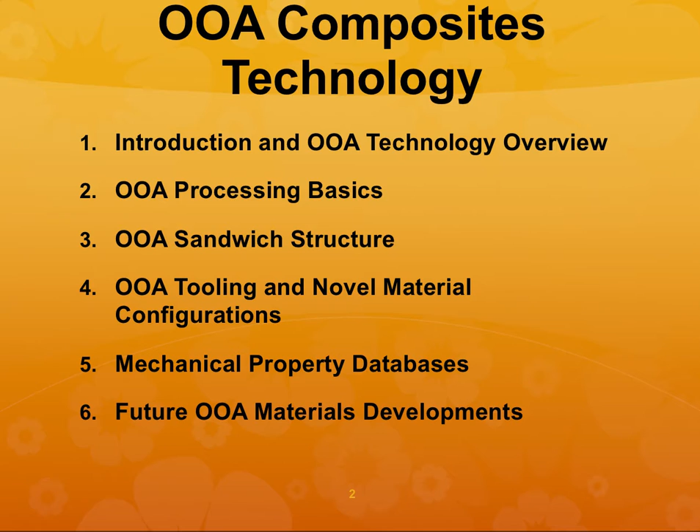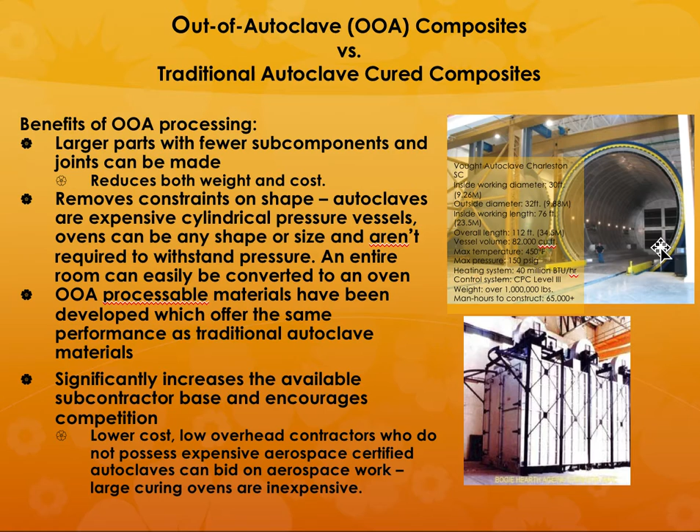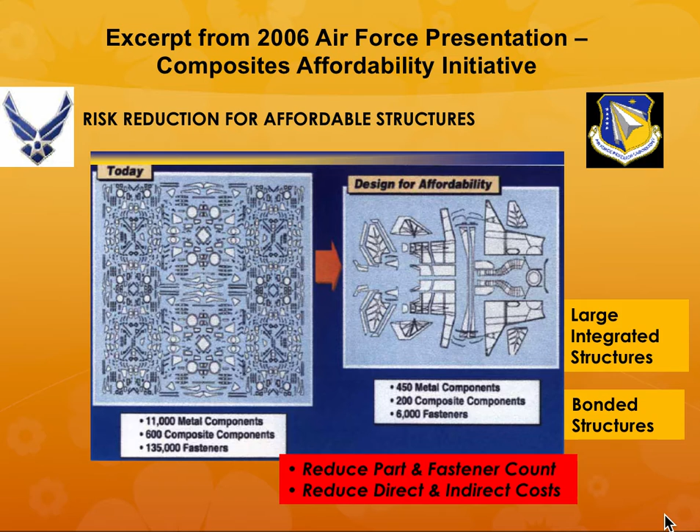So a couple of years ago, maybe 10, 11 years ago, the Air Force started a process, especially when they were thinking about making the F-35s using about 40 to 50% composite parts. They said that if you have to reduce the risk for affordable structures, especially affordable composite structures, then you need to make them all in one piece. Large integrated structures, bonded structures, and most importantly, you need to reduce the part and fastener count. So it reduces the direct and indirect cost of components.

So if you can remove the size and geometry constraint that is due to the autoclave size and shape, then you can make large parts and you can use relatively inexpensive equipment such as an oven. For example, we work with a startup company here in town called Infinite Composites, and we are making about 20-foot long by about 2 to 3 feet in diameter composite pressure vessels. In the past, they could only be made using an autoclave.

What we did was we just put a furnace around the part after it was made, and literally the outside walls were made out of cardboard. The inside was well insulated, so whatever temperature it went to, it did not burn off the cardboard walls of the furnace. And if you have to redo the furnace, you could do it.

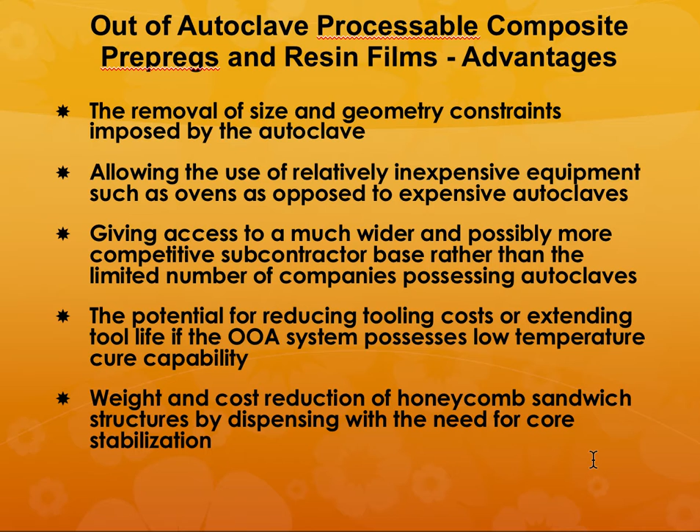And it helps to reduce the tooling costs because the out-of-autoclave system possesses low temperature cure capability. And then you can reduce the need for what is called core stabilization. So again, it reduces, it goes to the point of reducing cost.

I'm not going to go over every single slide in this presentation, but I will quickly go through it. I would like you to go through this presentation, and it's pretty self-explanatory.

So I talked about what are the advantages, and next we will talk about what are the materials. You can use low cost oven and vacuum bag processing, but the most important requirement is that the pre-preg has to be breathable, and how you put it together is very critical. And then when you are heating it up, the resin has to flow and evenly wet out the fabric.

So viscosity during the cure cycle is critical. It must remain high enough so that it doesn't flow out, and the matrix remains within the part, but it needs to be breathable also so that there is no porosity left behind.

By the way, why do people typically use autoclaves? It's because you want to avoid porosity in the part as much as possible. So when you make it using an out-of-autoclave process, you have to make sure the porosity is minimized and within the requirements of the part.

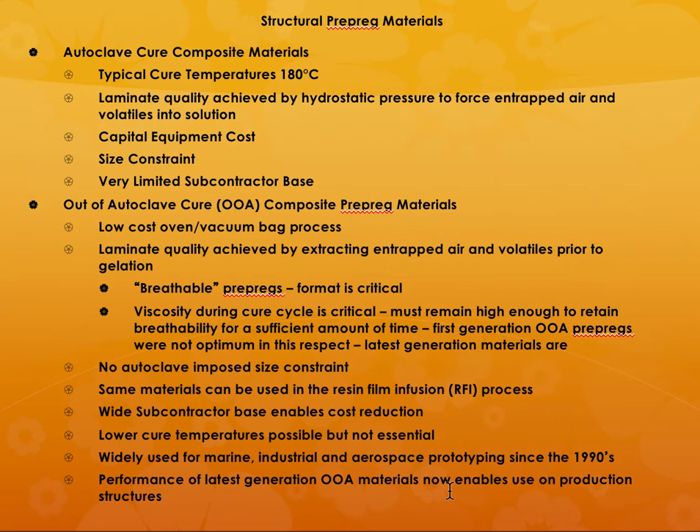What is the requirement of out-of-autoclave processing? The material we use has to result, maybe not the same as 100% of what you would get with an autoclave process, but at least it should be 90 to 95%. It cannot be like 65 to 50%. It has to be about 90 to 95% of what you get in an autoclave process.

These are being used in a number of industries, and you can use all kinds of standard composite processes: wet layup, liquid resin infusion, resin film infusion, and prepregs. So what you would like to do is use prepregs as far as possible.

Why prepregs? Because prepregs are more standard. You do not have to worry about the quality of the prepreg because somebody else is making it and giving it to you. So you can use prepregs in an autoclave process more than any other type of process. But resin film infusion, or RFI, is also another technique that autoclave processing has been using quite a lot.

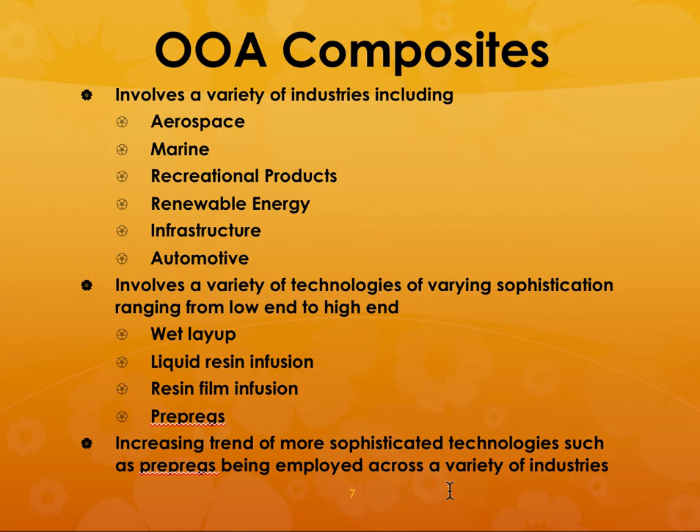In the liquid resin infusion process, there are three varieties: RTM, VARTM, and another process called SQRTM. I think I will remember the definition of SQRTM in a moment. Let me check that, I will tell you what it is. I want to remember that.

SQRTM. It does not tell me that exactly. So maybe that is another thing that you could probably look through.

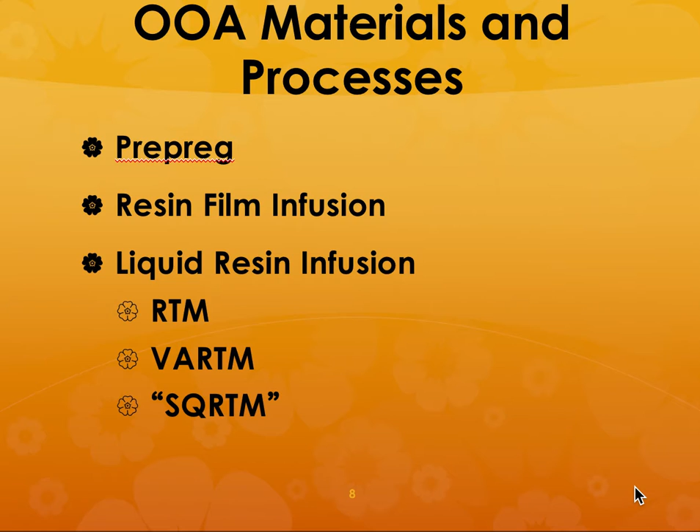I'm glad I looked it up. That's something I learned today. I had remembered, but I'd forgotten what it was. So thank you for making me do that.

For pre-preg, there are a couple of things you need to know. First, you can have a 350F pre-preg or a 250F pre-preg. The Advanced Composites Group qualifies 350F as HTM, or high temperature molding technology, and 250F as MTM, medium temperature molding technology. These also need to be post cured afterward, load post cured, so whether or not you use post cure, you can call it differently.

There is also another set of prepregs called low temperature molding technology, or LTM. The advantage is you can use low cost tooling, so if you are making a first prototype, you could use LTM material. They also have variable temperature molding, anywhere from 150 to 250F. One thing to note: if you use 250F, you cure for a shorter time; if you use 150F, you have to cure for a longer time.

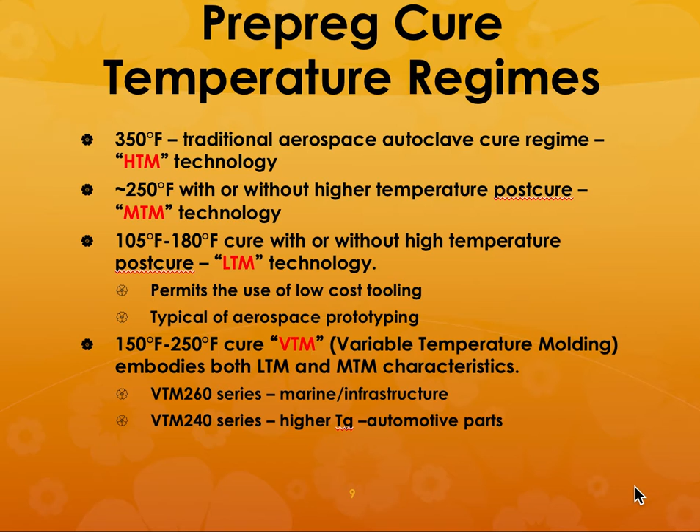These prepregs come in different series, signified by properties like high viscosity, low flow, intermediate viscosity, or low viscosity for heavyweight reinforcements, etc. The advantage is that many of these systems are co-curable and have variable cure capabilities. So you can cure 16 hours at 149 degrees F, then post cure at 190 degrees F, or do 16 hours at 149 and post cure at 250 degrees F.

If you use these components at room temperature, you don't need to do a post cure. One thing to note: many of these pre-pregs, even kept in the freezer, only last about 6 months. And if you take it out of the freezer for cutting and similar work, the out life is more than 30 days.

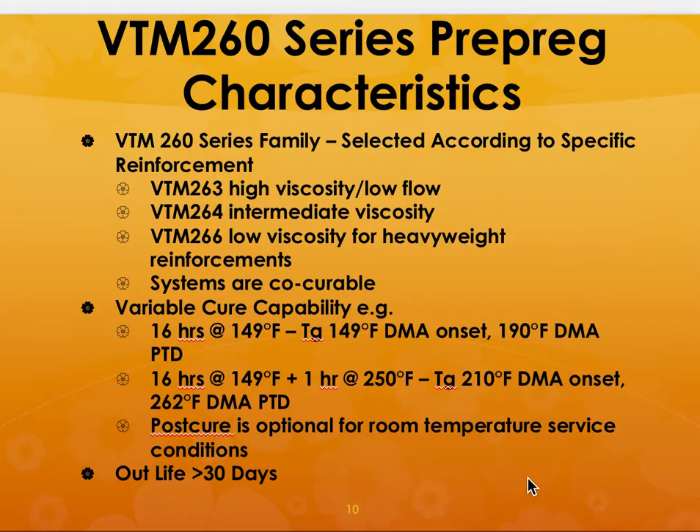Here are some marine applications: high performance yachts, interiors, hull structures, and components that are high up, using vinyl ester based materials. The advantage is that you would cure it at 65 degrees centigrade or 150F, allowing the use of low cost tooling.

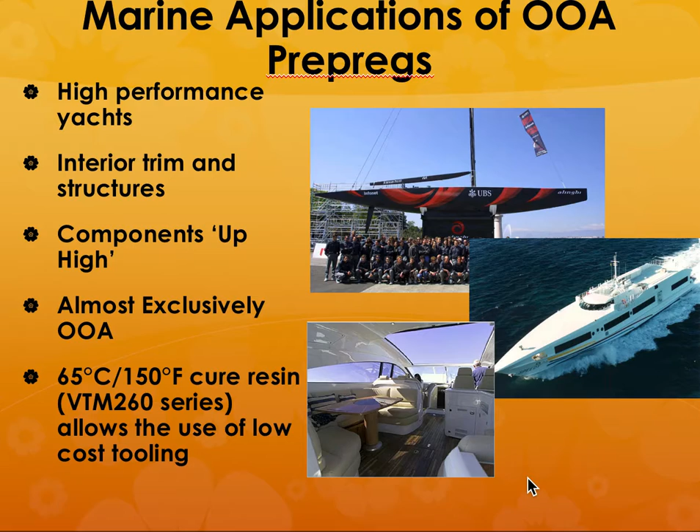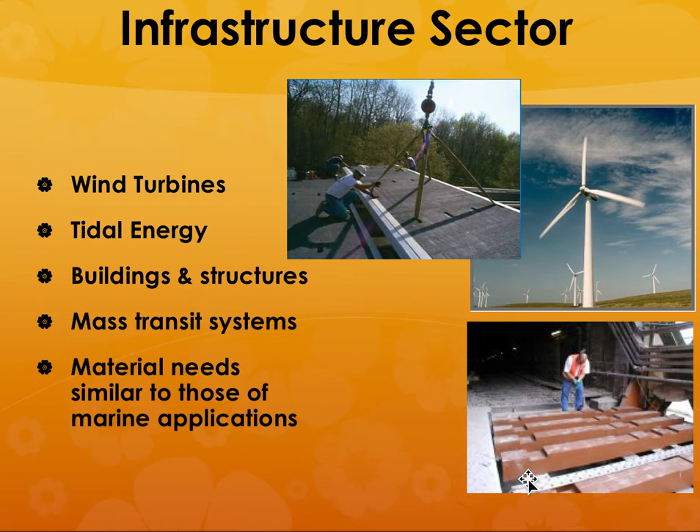In infrastructure, you would use these for wind turbines and mass transit systems, with material needs similar to marine applications. Or, if you are making them on site, you'd use them there too, since you cannot take it into a furnace; you have to cure it outside. So if you needed to heat it up, how would you do that?

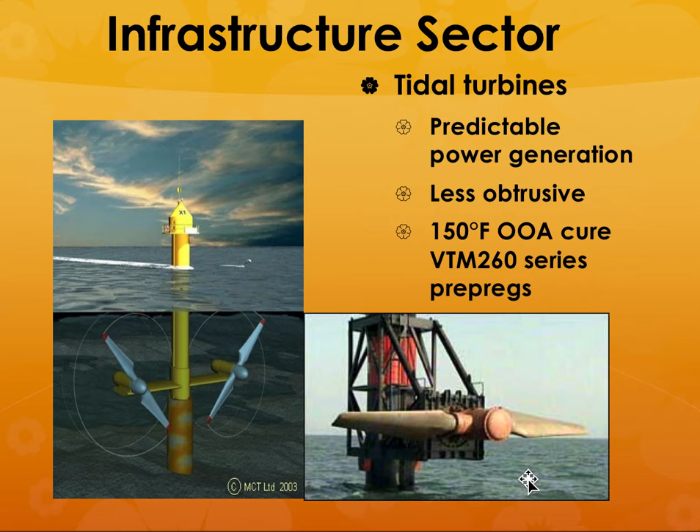You have to use heating jackets, which heat up to a certain temperature, so you can't go very, very high. You could probably go maximum to around 120 to 150 degrees F, or maximum 250F, not more, because your tooling has to transfer that heat inside to the component. If your tooling is very thick, you cannot really heat it up a lot.

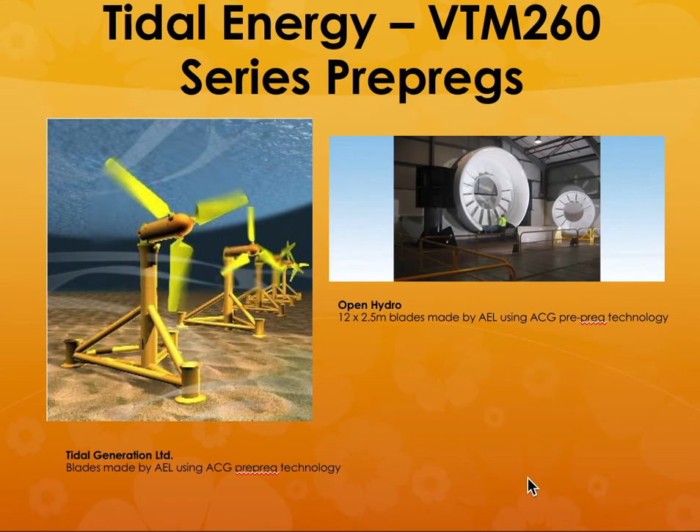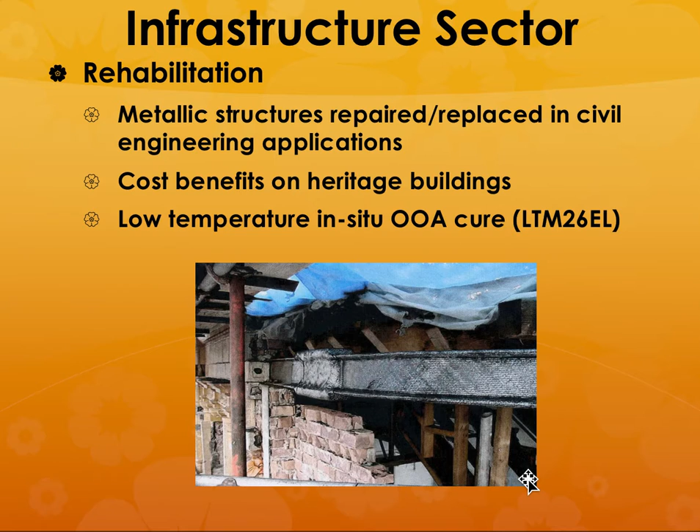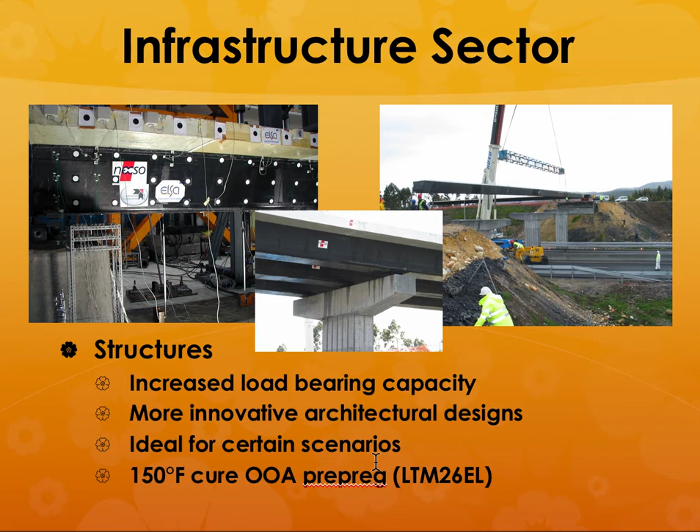So you can make components on site using out of autoclave methods. Or if you're doing infrastructure work like bridge repair, civil engineering repairs, or repairing heritage buildings, the advantage is you can do low temperature in-situ out of autoclave cure. Using a lower temperature cure, once it's done, it's as good as new. The advantages of such repair include increased load bearing capacity and the ability to make very innovative architectural designs, ideal for certain scenarios.

Marine infrastructure uses low cost resins like vinyl esters or polyesters, and glass fibers are almost exclusively e-glass. For aerospace, you have to use a higher temperature cure, so it could be graphite epoxy, and those need to be heated using solar heating, focusing the sun's rays onto the prepreg in order to cure it.

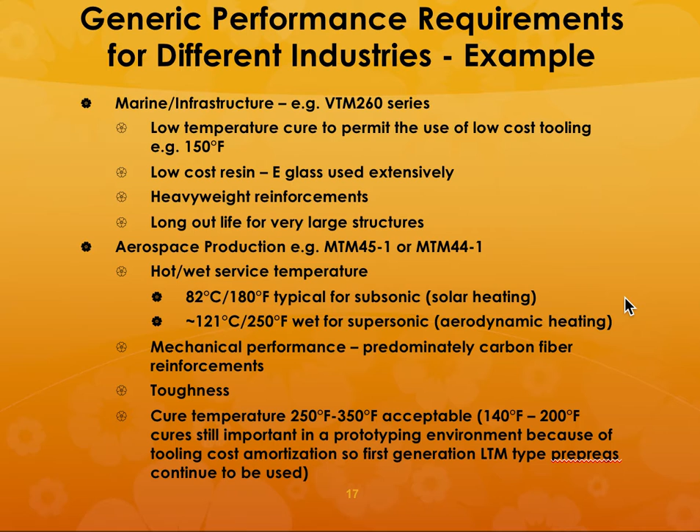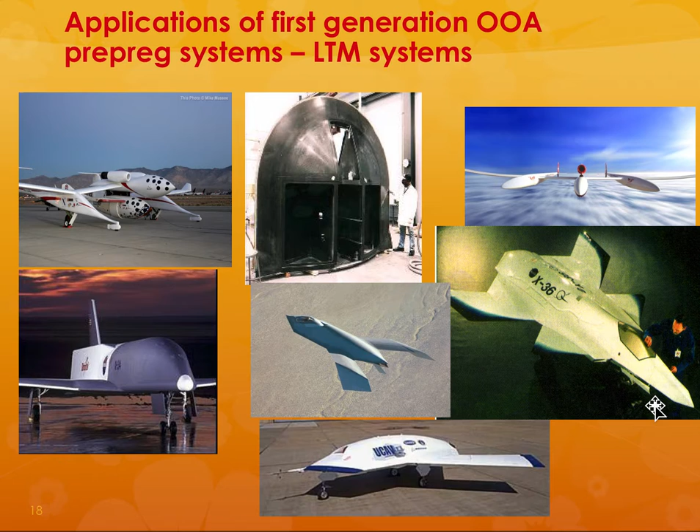So again, these are some examples of where composites are made using out-of-autoclave processing. Here is the solar plane that was completely made in one single piece, made by a company out in California, probably Virgin Galactic. And then this one is made by Lockheed Martin at their Palmdale facilities—it's a UCAV, unmanned combat air vehicle. This one is the X-36 plane.

So these are all made using out-of-autoclave processing. Here is an example of cost savings achieved using the first generation, low temperature curing at 60 degrees centigrade. They have figured out that the cost savings itself is 70% in tooling, and design and development is 23%. So it gets down to this much—tooling cost reduction is 70% and part cost reduction is 50% using this approach.

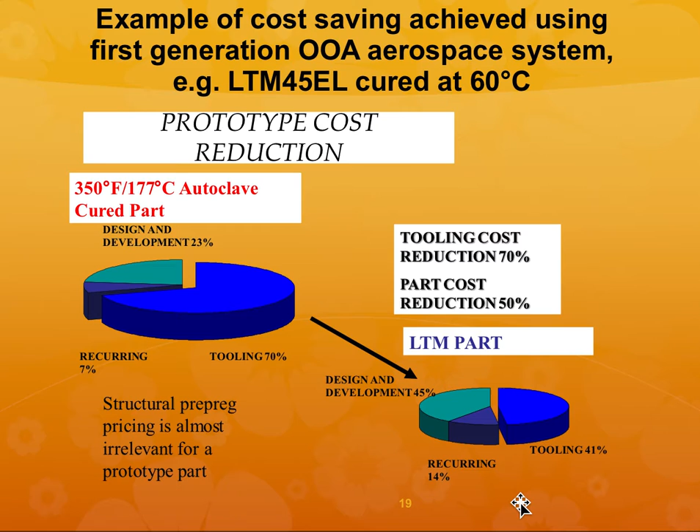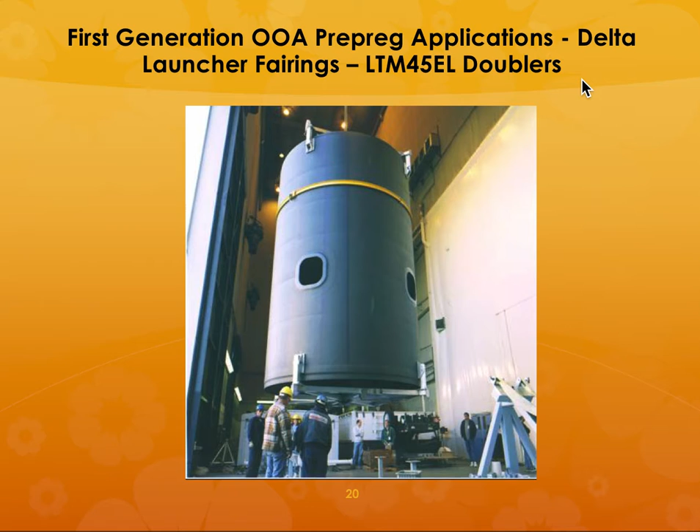So this is the Delta launcher fairings, and they are made using low temperature out-of-autoclave pre-preg. So what are the issues we need to worry about? You need to worry about porosity, toughness, how much life you get when you take it out of the freezer, what is the cost, and what is the handleability of these materials.

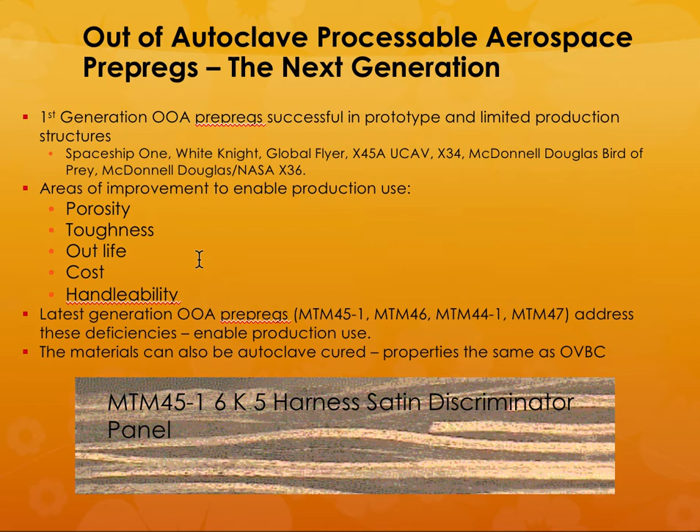So you can see this is the standard material properties, and if you increase the temperature to which these are exposed, the standard material has a reduction in compression strength after impact versus wet Tg for various pre-preg epoxy resin systems. This is the autoclave curing system, and this is the out-of-autoclave capable system. What you can see is that the out-of-autoclave system is even better than the autoclave curing system, even after exposure to wet conditions and higher temperatures.

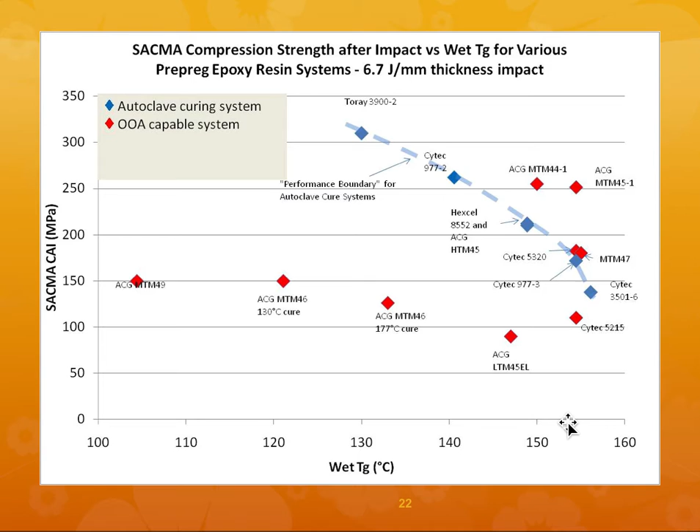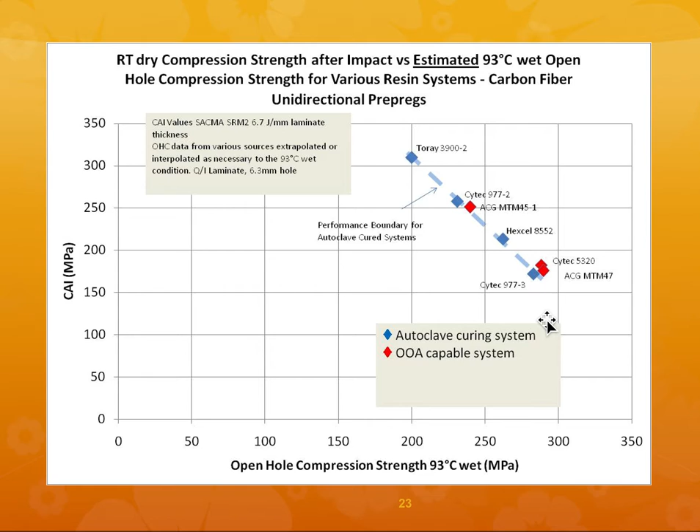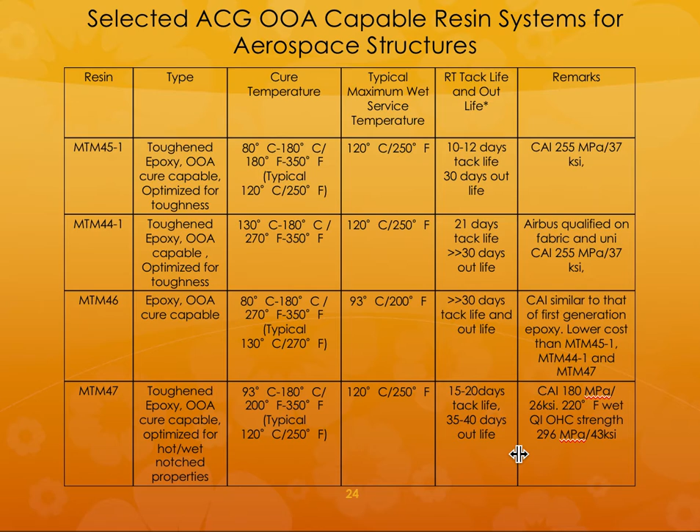So what is the advantage? You can keep them out for 10 to 12 days, with 30 days out-life. In this case it is 21 days. This could be more than 30 days—about 15 to 20 days tack life, 35 to 40 days out-life. So all you have to do is ensure you're using it within the time limitation, and you should be able to get the right kind of properties.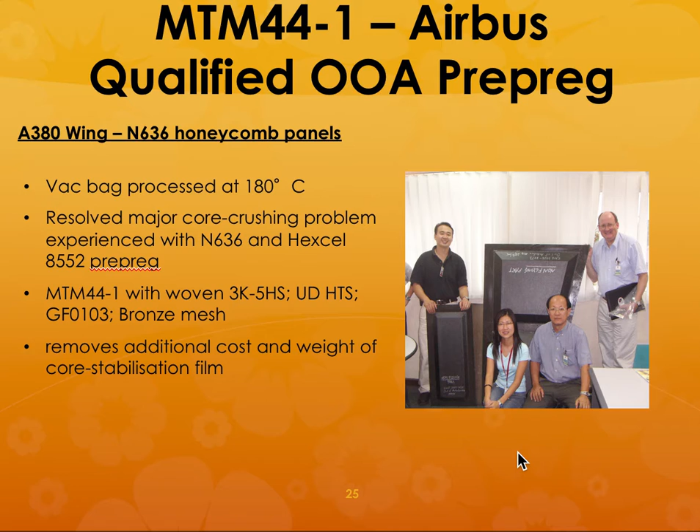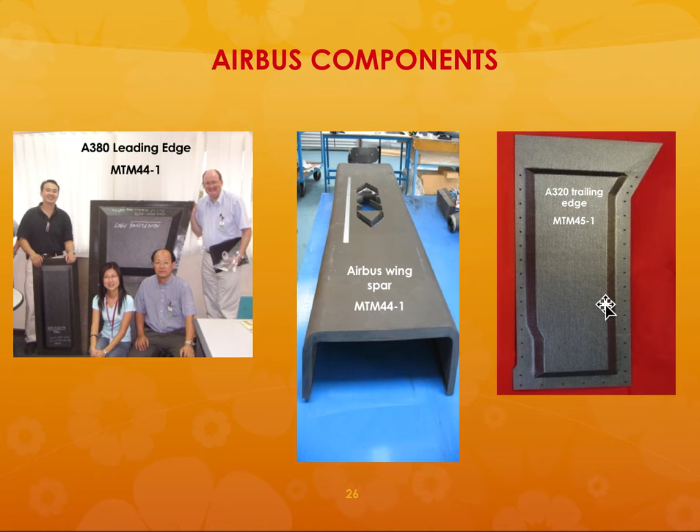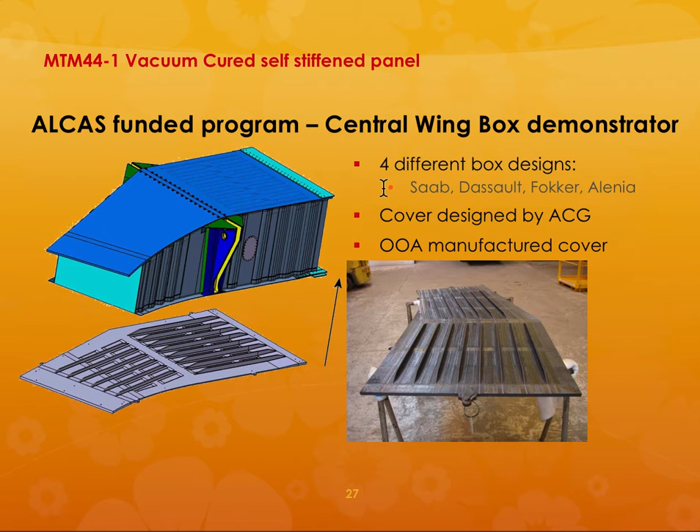So these have been qualified and are being used by a number of manufacturers, like in this case Airbus. You can see they are qualified—in this case it's the Airbus wing spar, and in this case it's a trailing edge. These were made using out-of-autoclave pre-preg type material. This was a demonstrator for Saab and Fokker, made using these materials outside. It was a demonstration part, but they found it would have the same kind of properties as parts made using standard pre-preg materials that are autoclaved.

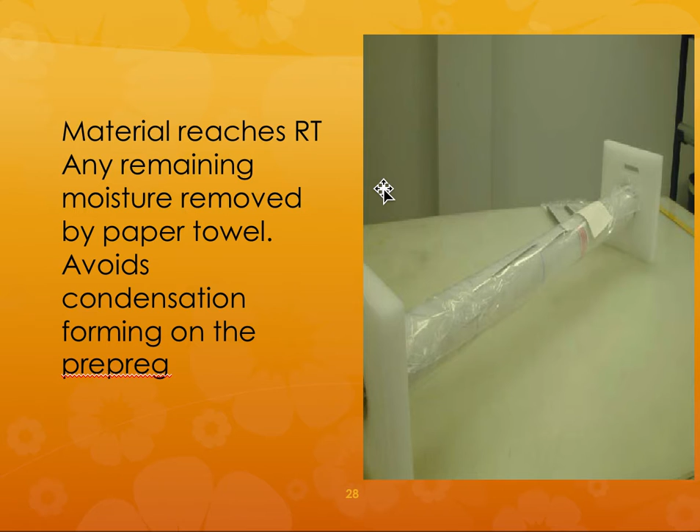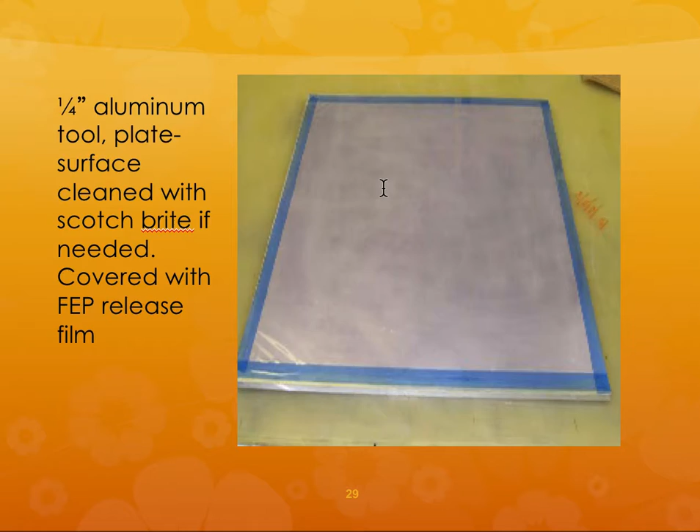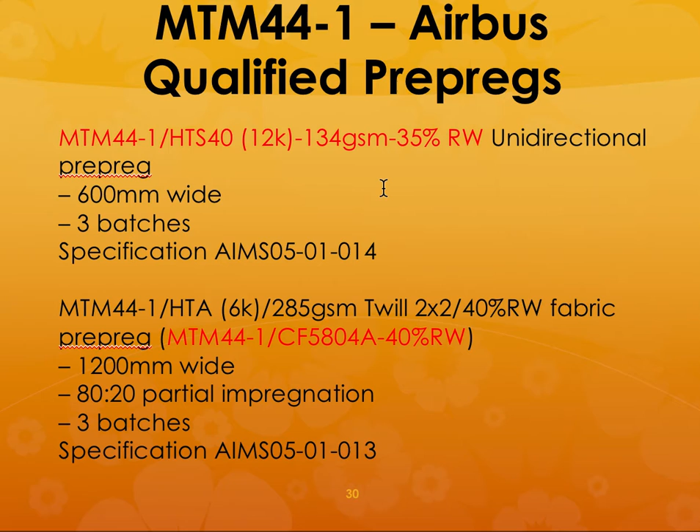So once you take it out of the freezer, you have to make sure it reaches room temperature, and then any remaining moisture is removed with a paper towel before you do the layup and curing. So these are the steps in the manufacturing process. Again, these are the different medium temperature pre-pregs, qualified by Airbus.